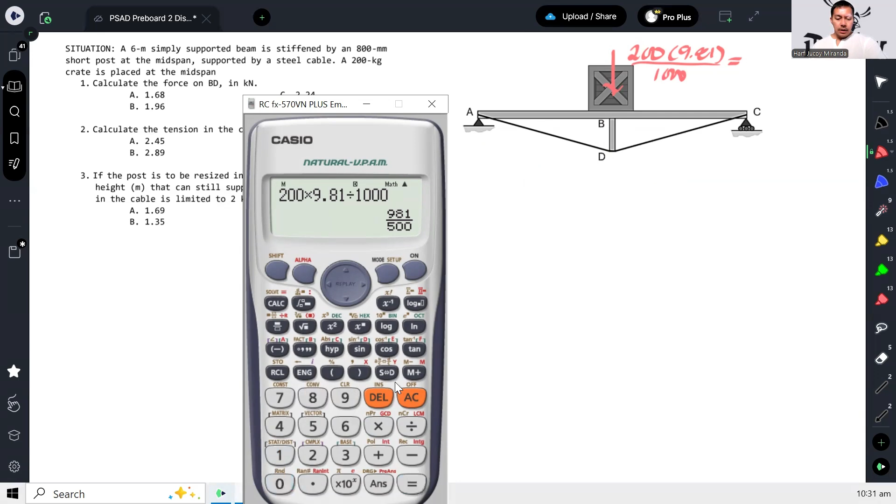So, lagyan natin ng mga weight. So, ang weight daw nito 200 kilogram, no? Pero gawin nating Newton or kilonewton. So, times 9.81 divided by 1,000 para maging kilonewton. And that gives us 1.962 kilonewton. Okay? So, ang tanong, ano daw yung force sa BD?

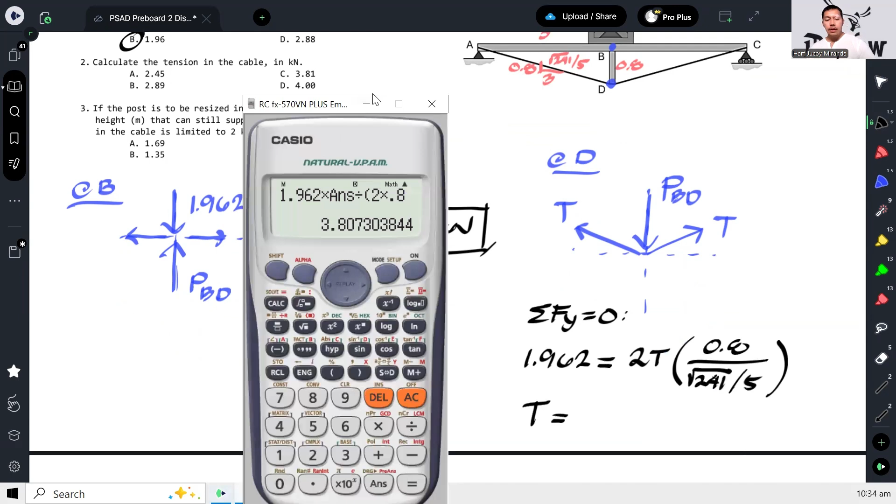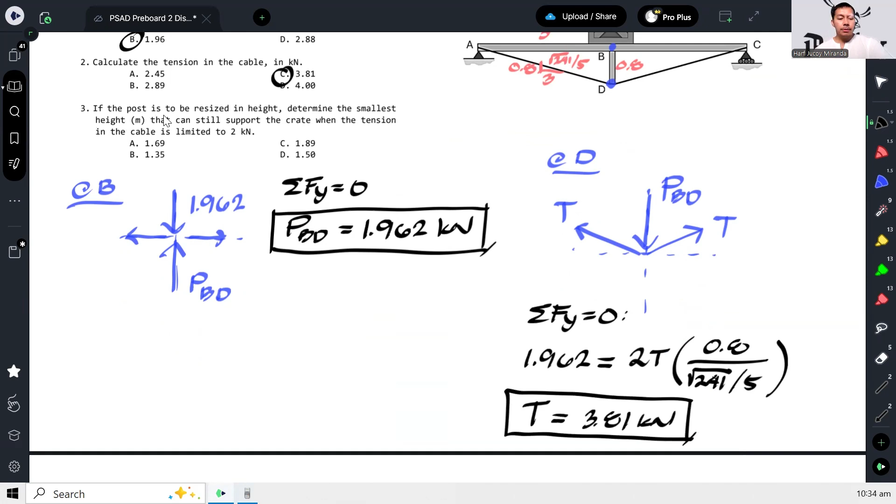And then lastly, if the post is to be resized in height, determine the smallest height that can still support the crate when the tension in the cable is limited to 2 kilonewtons.

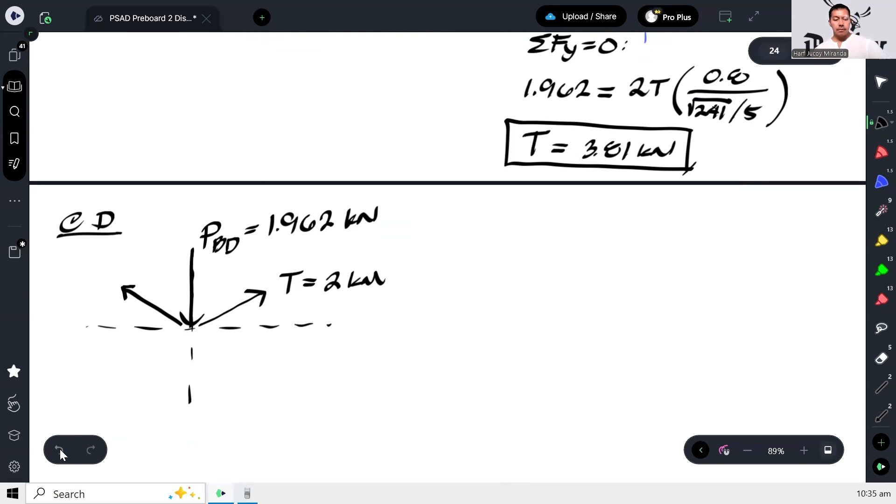So, ibig sabihin, iset natin na ang slope niyan, tawagin natin to na y, pero dahil nasa midspan, 3 pa rin to. So, yung hypotenuse natin, square root of 3 squared plus y squared. And to solve for y, magsa-summation of forces lang ulit tayo. We have 1.962 downward. Equate natin sa dalawang T. Tapos ang y component niya ay y over square root of 3 squared plus y squared. And from here, we just solve for y.

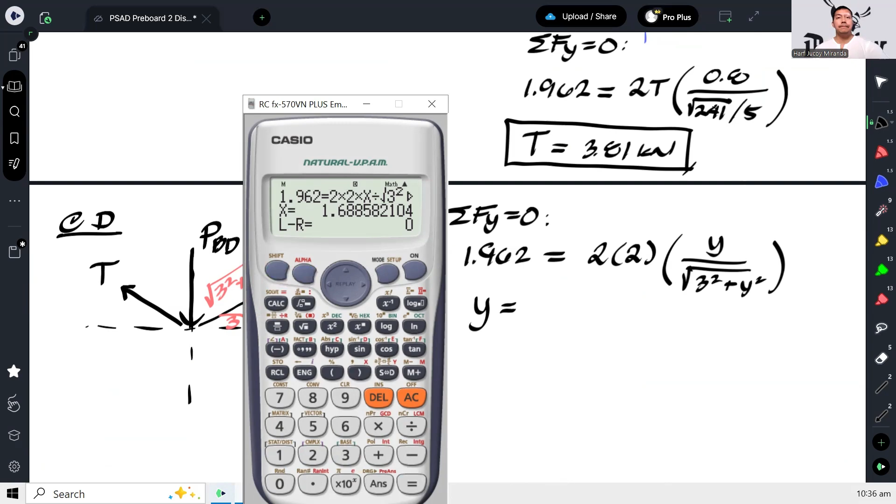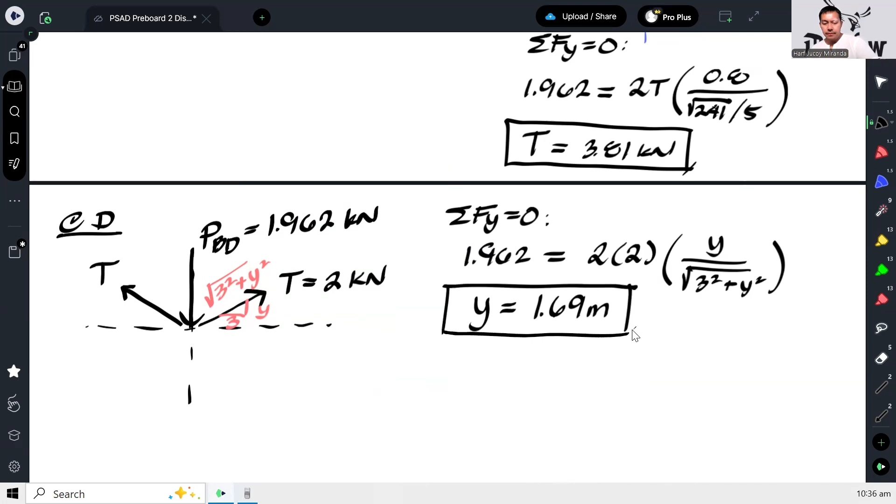Then that gives us 1.69 meter. Okay? And that's our answer. Number 3 is letter A. So that's how we solve this problem.